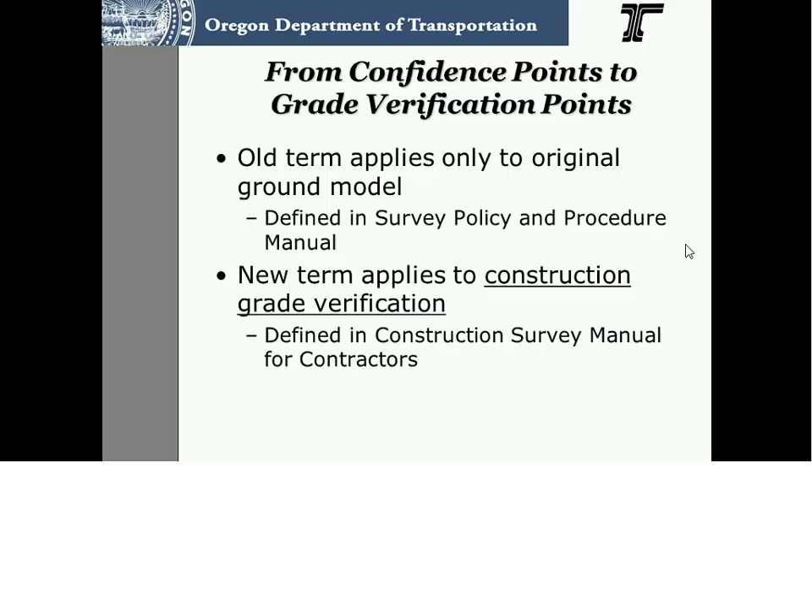We're not just changing the name. We're going to change the process a little bit, and we're just going to shift the way we think about these to eliminate some confusion and to hopefully add some statewide consistency.

So the goal of this whole shift is really to get rid of that confusion. Confidence points have become the constructed grade checkpoint and method, and people were using the confidence point evaluation method on constructed grade, and it just wasn't working out.

Every PM office across the state could apply the old spec however they wanted, and it really led to some statewide inconsistency. We're hoping we'll be able to reduce that inconsistency and reduce the contractor's risk when they bid these jobs. They'll know exactly what's going to happen in any office they go to, and hopefully we're going to increase our quality control and our quality assurance on these projects.

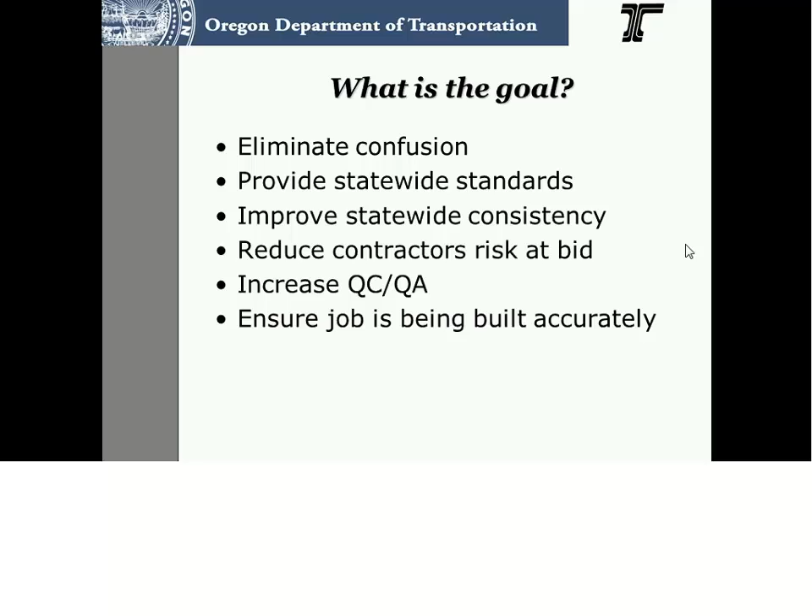So how did we get there? The process

Is everybody hearing me? Raise your hand if you're hearing me.

All right. How did we get there? This has been almost a 2-year process. We had a confidence point committee, and we had 10 to 12 people working on that committee most of the time, from contract admin, the specifications unit, and the engineering automation section. We had some people sitting in from the PM offices.

It was really a wide-ranging group of people all working together to try to come up with an answer for what we called our confidence point problem. But it kind of caused a ripple effect that led to a much bigger piece that we had to tackle. At one point we had 26 pages of proposed changes, and we saw this very interconnected web of parts and pieces that had to be changed all at once.

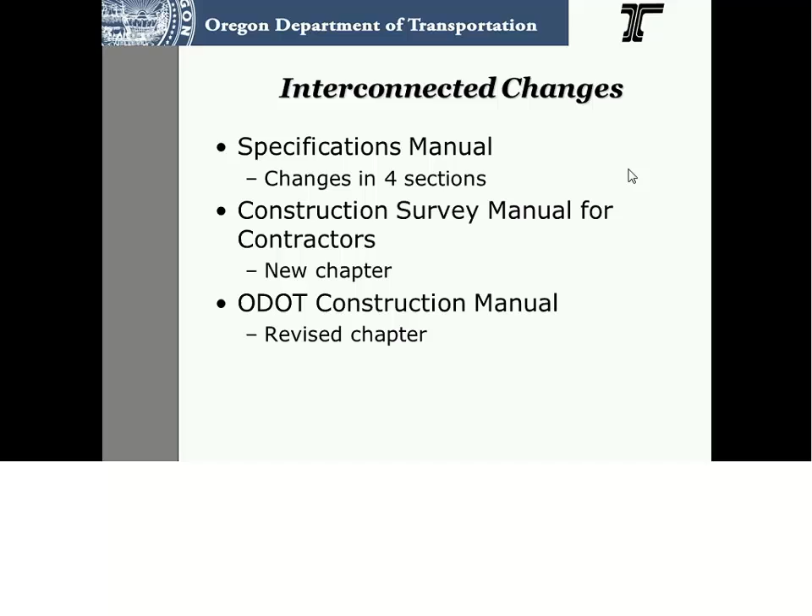We ended up with 4 changes in the actual specs book. We made changes to the construction survey manual for contractors, and we made changes to the ODOT construction manual. And we decided to just publish all these changes at once and make one big change and push it through to the end.

The first big change we made was to the SP 305, the special provisions for construction surveying, and we called out 3D engineered models right on the front page of the SP 305. We really have been pushing to include 3D models in everything we do, and they're now being included in all the eBids packages, and they're being shared with the construction survey handoff. We've kind of taken the 3D model out of the shadows and put it right on the face of the document.

The way we were doing things was fine, it was working, but we were eventually going to have a claim that involved a 3D model, and it was going to blow up the whole system. But now we have a way to work through the process of dealing with a change in the 3D model, and everything should be a little smoother in the future.

So what actually changed on the SP 305? Well, we required a close the loop for the 3D model right on the 305 spec. The designers have been wanting this closed loop for quite a while, but it didn't come out exactly as we had planned. We're already looking to make a few revisions to this change, so be expecting some minor tweaks to the 305 spec.

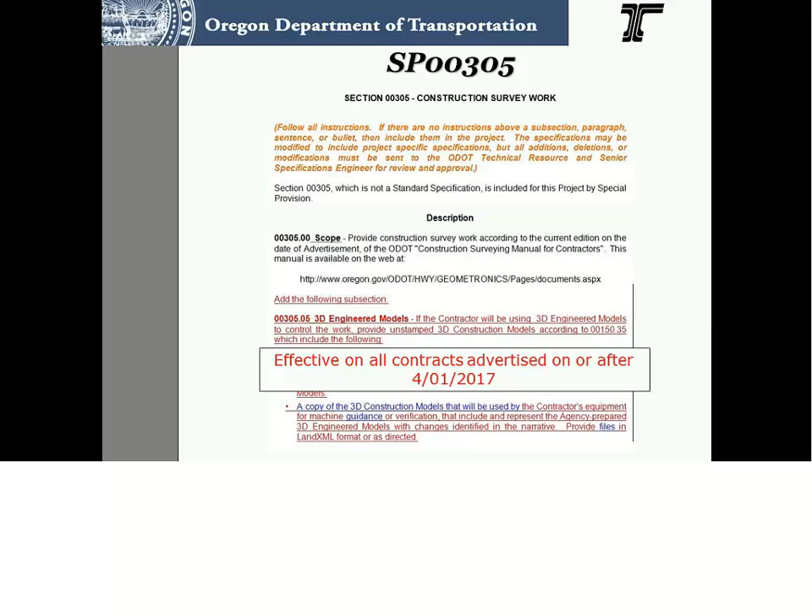And this is an effective specification. It's been through all the change process, and it's on every contract that went to advertisement after April 1st. So after the 305, we realized we had to change some other parts of the spec book. We made a change in the 140s to the scope of work. We added it to the list of items that could be changed that wouldn't affect the contract.

We made some changes in the 110s. Those are the definitions. We added the definition of a 3D engineered model and a 3D construction model. The difference between the two is the engineered model is the model of record created by ODOT or our consultant, and the construction model is the model that the contractor has developed, made, and changed to put into his equipment. And there is a distinction between the two.

The contractor, they change their models to fit their equipment, to fit the way they're going to do the work. So they're not the model of record, but they are a model that is out there.

Then we also changed the 150s, and I think this is the biggest change in this whole change process. We added the 3D model to the order of precedence. Before, we had no digital items in the order of precedence, and now we do. As we build confidence in these digital models, I think it's going to move up. Right now it's pretty far down on the list. It doesn't supersede the paper plans.

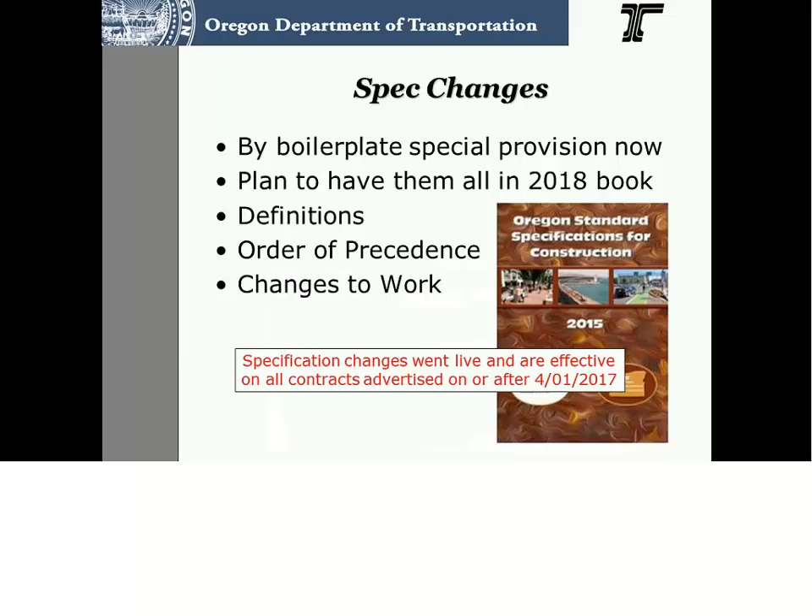So after the specs, what did we do next? We started working on the construction survey manual for contractors. And really that's where this all started. We thought we would just make some tweaks to the construction survey manual for contractors and change how we talk about confidence points and grade verification points. But there was too much to handle in just that document, and it affected so many things.

So there's a new version of the construction survey manual for contractors, and it's online currently, and it was attached to all contracts that had an advertisement date on or after January 9th. So it should be on all contracts that were started this year.

We got a whole new chapter in the manual, chapter 8, and it's a pretty big change in how we think about grade verification, but it's not much of a change in how we actually collect the points and work with the points. We did test it out on the Oregon 62 project with the White City office. They came to an agreement with the contractor just on a handshake to use the new method last summer, and they collected all their grade verification points using the new method. They really had no problems at all.

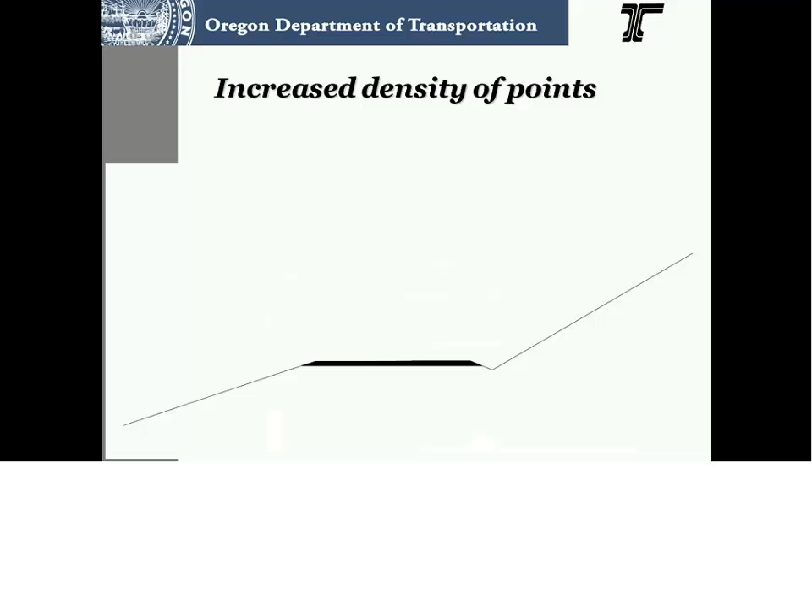For the contractor side of things, not much changes. What does change is we increase the density of the points. So we're going to define two areas. One is within the subgrade area, and we're going to ask them to get 1 point per 500 square feet, and that is twice as many as they were getting in the past. And then outside the subgrade area will be 1 point per 1,000 square feet.

And it may seem like a big change. We've doubled their points, but we looked at the stats for quite a few contracts over the last few years, and what we saw was most contractors were already giving us more than 1 per 500 square feet. So now we have it quantified.

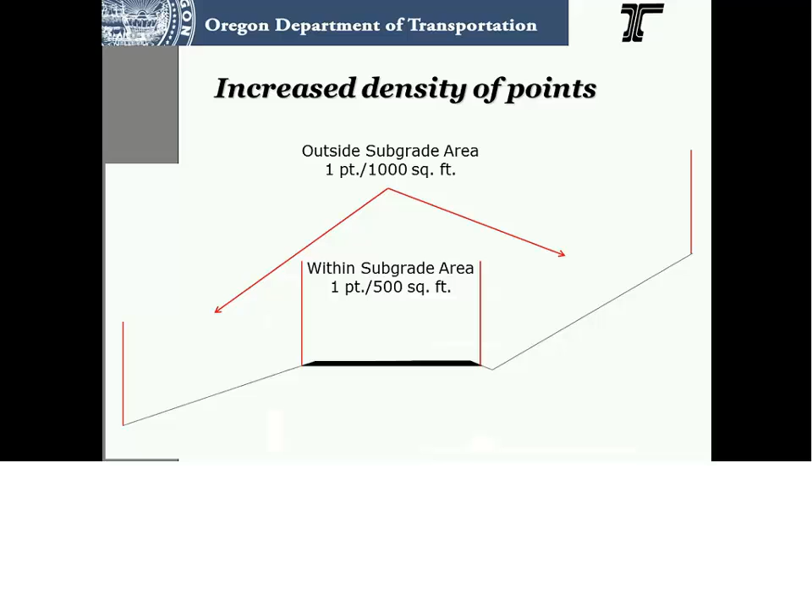We're asking for what we want, and we hope we get better results and a better check of what we're getting. With the old stats, we were paying for a lot of area with very few points. And the thought was that if we just increase the density, increase the number of points we're requiring, we'll have a better gauge of what is actually being constructed and what we're actually paying for.

So on that same note, we added some new field codes. They're on the new field code list, and I'll send that out at the conclusion of this meeting. They've been out since January. They're GVP A, B, C, and D, and they all have a matching tolerance. The first one is the 1/4 inch spec, basically. The second one is the 1/2 inch. The third one is the 3/4 inch.

And then the fourth one doesn't really apply to a set tolerance for a constructed item, but we put it in there to allow people to have another tolerance for rougher material construction, kind of a catch-all for everything else, mostly the things outside the subgrade that we've been measuring. And you'll notice they don't correlate at all to the confidence points that we've been using for our original ground model. It was never the intention of the confidence points to become a construction tolerance.

The confidence points were just to check that original ground model to see if it fit, to see if our quantities were going to be okay. But for constructed grade, we need to use the tolerance that's spelled out in the spec book for each type of material, each type of construction, each location. So we're really trying to separate the two setups.

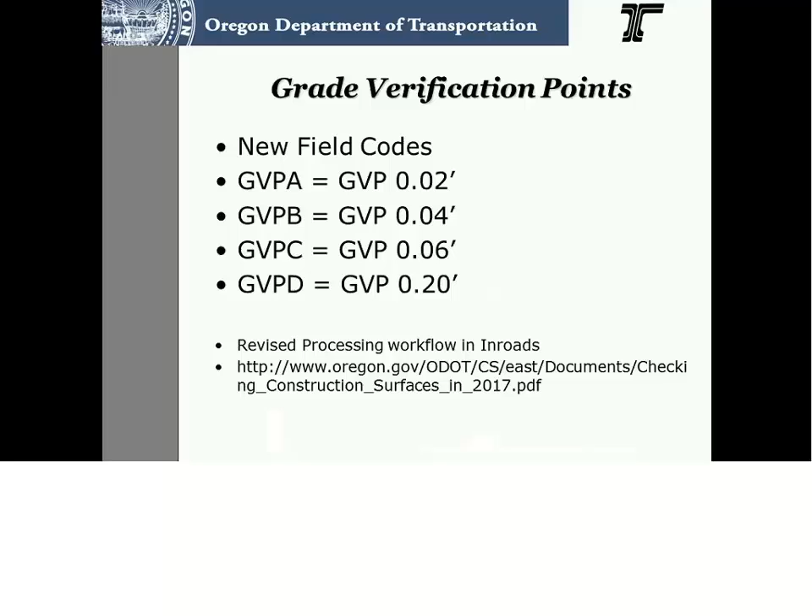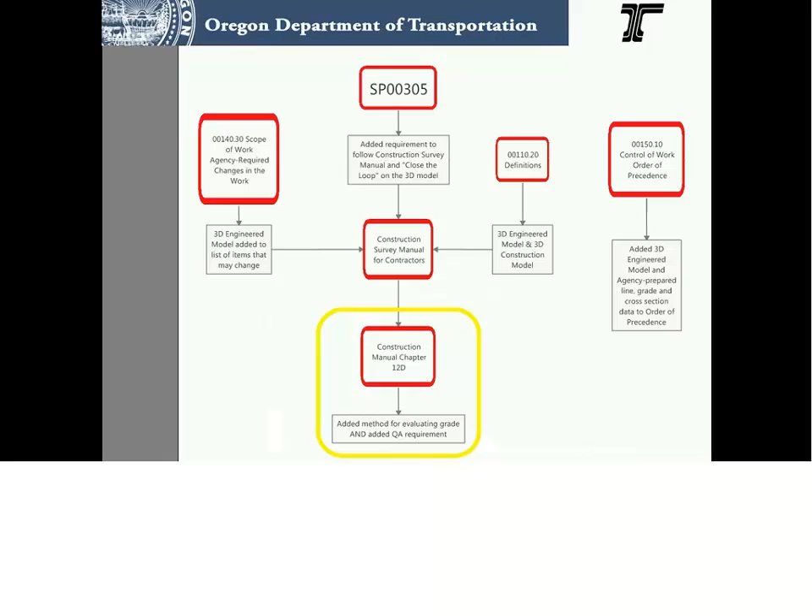So after we tackled the construction survey manual for contractors, we realized we needed to change the construction manual. And we added a method for evaluating these grade verification points. The survey manual alone didn't really do much. It just changed the names and the rate of collection. And we took out all mention of a test procedure in the construction survey manual, and we moved it into the construction manual. That's where most of our other test methods are discussed.

We talk about all the testing in the construction manual. And the contractors really don't need to test these points. That's ODOT's responsibility. So it made sense to move it out of an instruction manual for the contractors and put it into the instruction manual for ODOT. And so that's what we did with the changes to the construction manual.

And we added a big item in the construction manual, and that's a requirement for ODOT to do some quality assurance. So we've been doing quality assurance on almost all the other items and materials that the contractor tests. ODOT always does quality assurance on top of that. And so we're going with that same philosophy here with our grade verification points.

If the contractor is expected to collect 100 shots for a certain area, ODOT should be getting 5 to 10 shots in that same area. How this is going to be done, this is going to be the biggest area of change in all of these specs. Our inspector is going to be getting them. Our PM office surveyor is going to get them.

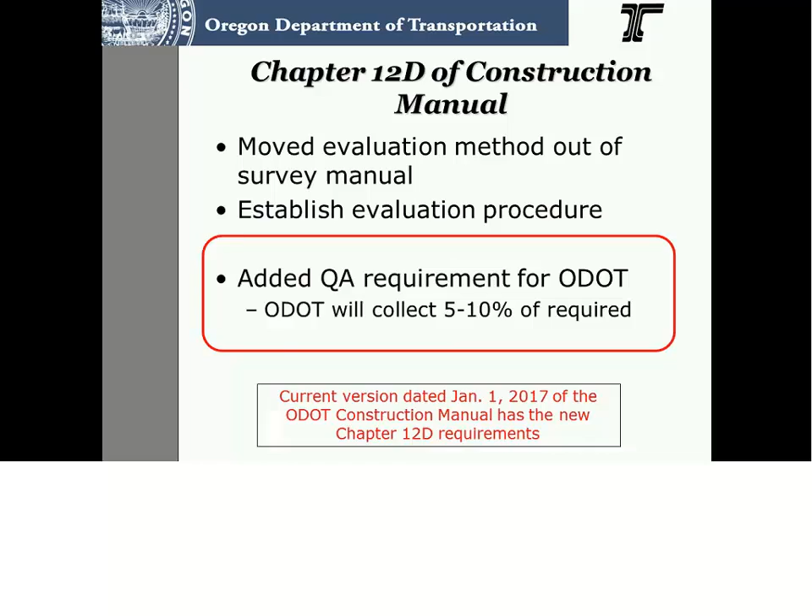So what's next after all these changes were made? Well, we're going to have to try it out for a summer, try it out for a construction season, and see how things are working. And then we'll evaluate and make some changes and come back around and adjust the specs if it's just not working.

We're already going to be making a few tweaks to the SP 305 spec. It didn't come out exactly as we thought it was going to, so we're going to make those changes right away. We're going to tackle some of the other measurable tolerance specs. We have a lot of materials, a lot of parts of the job that we don't have a tolerance on that we can measure to. It's to line and grade, or it's per plan. Well, what does that mean measurement-wise, survey-wise?

We're going to try to take all the fractional measurements and turn them into decimals. We measure in decimals. We don't go out there and measure with our total station and our GPS in fractional inches. We've changed quite a few of them already. I think we had 6 or 7 specific specs changed from fractions to decimals already. We have a few more to get to.

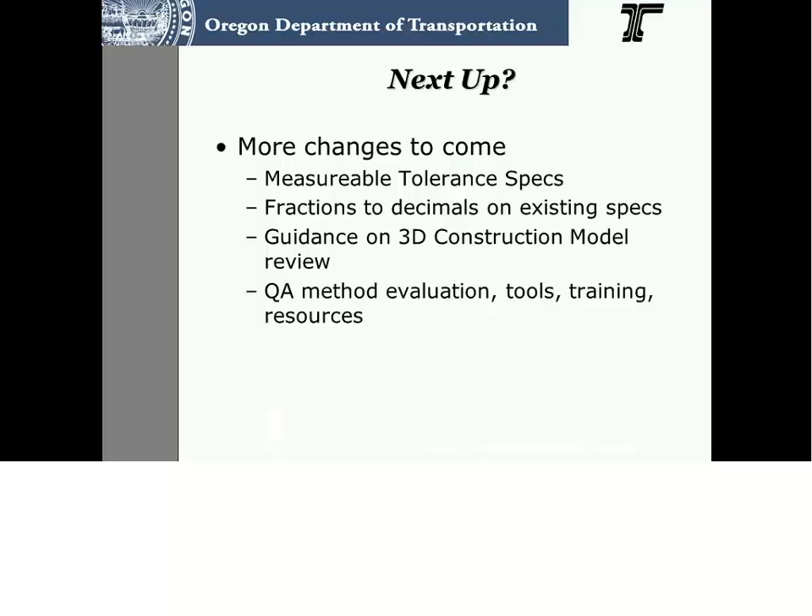So now I'm going to move into something a little lighter than specifications and tolerances. Got to give a quick tablet update. I've been all over the state in the last few months, and I may have made it to all the PM offices except for Troutdale. I drove by it, but I didn't stop. Coquille and Pendleton. But I made it to all the other offices, and maybe on my next road trip I'll get those 3 missing offices.

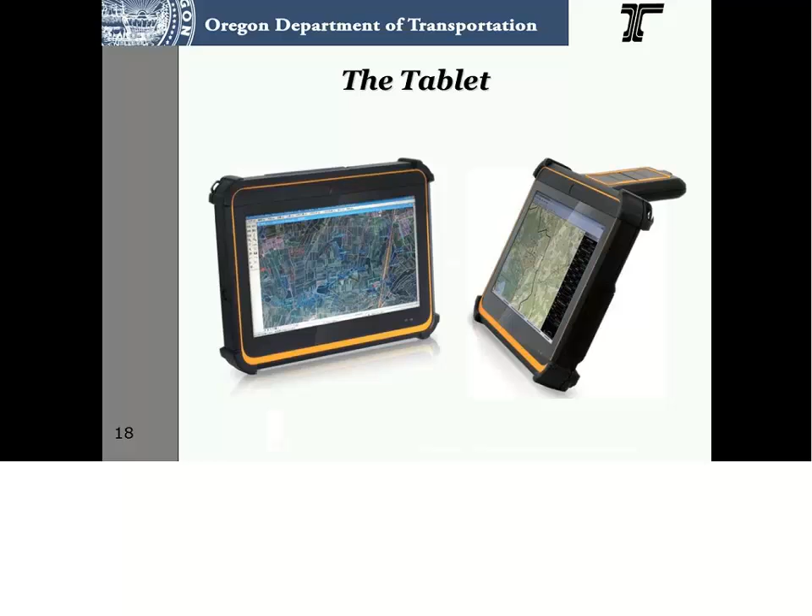So what's the current status of the project? It's still somewhat of a pilot project. We have 40 tablets out there. I've trained about 100 people, and the tablets are in all 15 construction offices, including Coquille, Troutdale, and Pendleton. They have tablets. I just didn't deliver them personally.

So I've been providing training to all the people that get a tablet, and as they get used more, we're going to know what areas we need to train additionally, what I need to drop from my training, how people are using them. It's really going to be helpful this summer to get some feedback, because half of the PM offices just got the tablets this spring. So this will be their first construction season of using them.

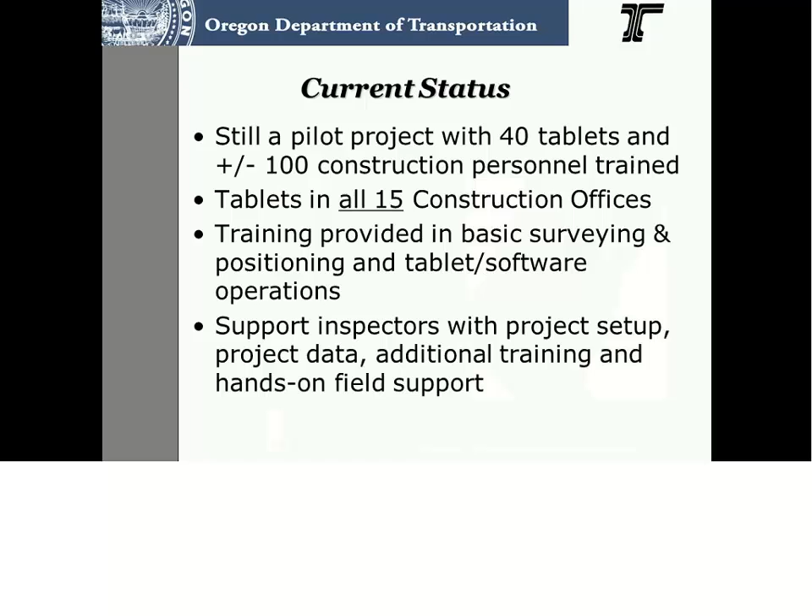And I'm still providing direct support to the inspectors, helping them set up their projects, helping them configure their data, going out doing hands-on training on their project sites. I'm kind of a one-man show for the tablets at this point. But hopefully we're going to hire another support person in our unit here, and we'll get a lot more ability to go out and help and assist.

But on top of the construction offices, we've also had a few non-construction, non-inspectors get their hands on the tablets. We have a tablet in a district maintenance office. The pavements unit has one. A sign designer has one. A utility specialist just got one. And a geoenvironmental unit just got one.

And as surveyors, we're going to see some of the data that some of these people collect. Some of these groups are just using them totally by themselves for their own in-house use. You're never going to see the data they collect. But the geoenvironmental people, that's where you're going to see some of this data. They're going to want that data attached to your base map that you've owned all along. And this is potentially the most disruptive and most dangerous area I've gotten into, with getting other people to collect data that they want to put into the base map.

So we've gone over a lot of training with them, a lot of best practices, but I have a lot of work to do in that small area to make sure it works, to make sure the data they collect is legitimate, is real, and can be trusted. Just because you can push buttons and get coordinates doesn't mean you're doing the right thing, and doesn't mean you have good data.

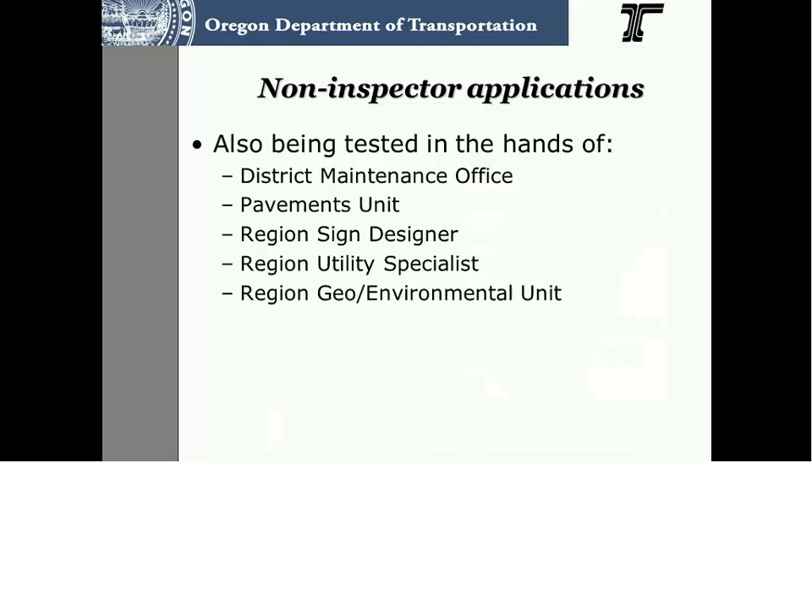So how good is the data? How accurate is it? The tablets can be used two ways, really. Handheld, where you just hold the tablet in your hand, and you can put it on a rover pole and look like any other surveyor. And handheld, they're about 2/10, 3/10. You're limited by your ability to position the tablet.

So if you set it on the ground, you can get the exact same number as if you had it on the rod. But you can't always set it down. It's not practical to set it down all the time. And sometimes when you set it down, you lose all your satellites because you're now standing on top of it. So I always say 2 to 3/10 when you're holding it by hand.

But if you put it on a rover pole, I will challenge you that it's got the same accuracy as any network RTK equipment. So 4 hundredths horizontally by 7 hundredths vertically. And if you want to take two measurements spaced out with time, you can get an average, and they're repeatable. The numbers are defendable. And the way I have them configured, I have it locked out so they can't collect data unless certain tolerances are met.

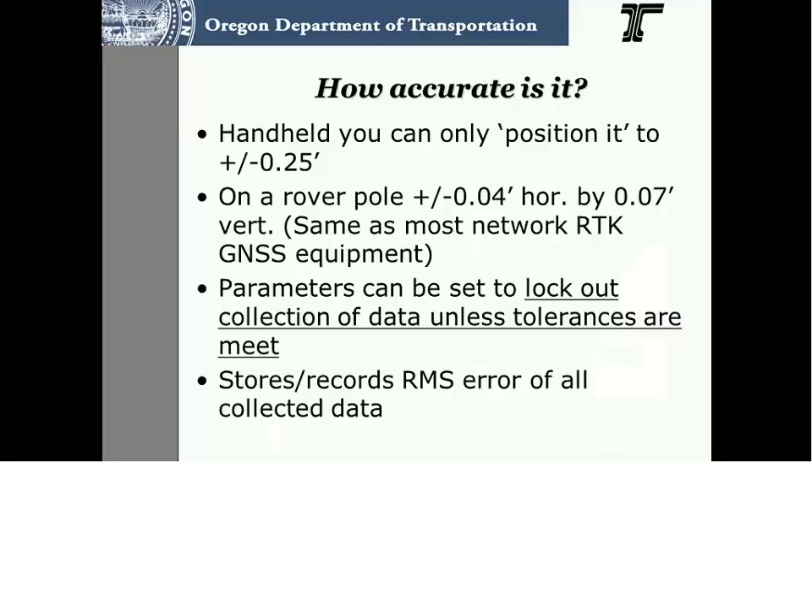And it's pretty good stuff. I would trust it if I had trained the person myself, if I saw the errors associated with the numbers they were gathering. And you can build that trust by checking it. And so what are people using them for? We're getting all sorts of uses. A lot of things I hadn't initially thought of. We train them to do positioning on construction sites, get their station and offset, collect some shots, check a surface.

But people quickly figured out that they could measure almost anything that they were measuring before with a wheel or a tape. They can measure with GPS. They're not trying to replace a total station when we need a total station to come in and collect data, but they're replacing their wheel and their tape measure or guesstimates with GPS measurements. And they're full computers, so they're also using them for productivity uses that we hadn't thought of either. But we're having areas collected for clearing, grubbing. We've had people do stockpiles, utility locates.

Just a lot of stuff has come up where people will call and say, hey, can I use it for this? Or I'll talk to them after they've had it for a while. They say, oh, we've used it for all these different tasks that we hadn't initially thought of, and it's worked great. We collect the data, we bring it back to the construction designer in the office, we check it against the model, we check it against the plans for position, and it's really paying dividends to be able to collect data real time right now out in the field.

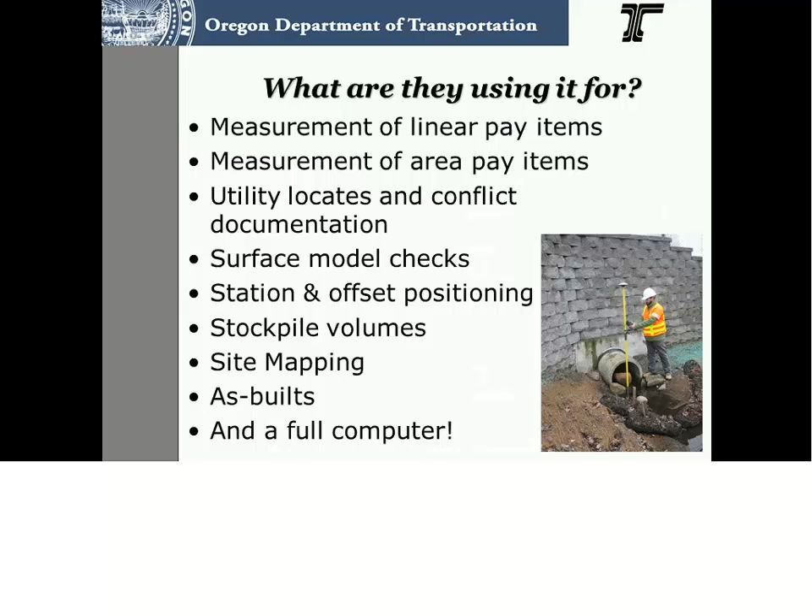And we've also put some other software on them. They can have their basic document editing software, some spreadsheet editing. They can view their PDFs. We just put Google Earth on it. The tablets will export directly to Google Earth, so people can check things immediately against Google Earth, make sure they're in the right location. You can email somebody a Google Earth file, and anybody can open it that has Google Earth on their computer or their tablet.

You can put the MicroStation viewer on there so people can interact with the digital drawings. And they're Windows 7 computers. So as time goes on, we're gonna find more software that is helpful. But they're still just a survey tool. They're not on the ODOT network. They're not a network device. You can't do your ODOT email or get onto ProjectWise or get to your network drives. They are a standalone survey device, much like your survey data collector. They're a computer, but they're not an ODOT computer.

And we're really pushing them to be a tool that helps, not a tool that wastes your time, gets in the way, or makes things harder. So I tell them, try it for 5 minutes. If it's not working, if it's making your job harder, give it up, go back to the way you've always done it, and just put the tablet away for another day. It shouldn't make things harder.